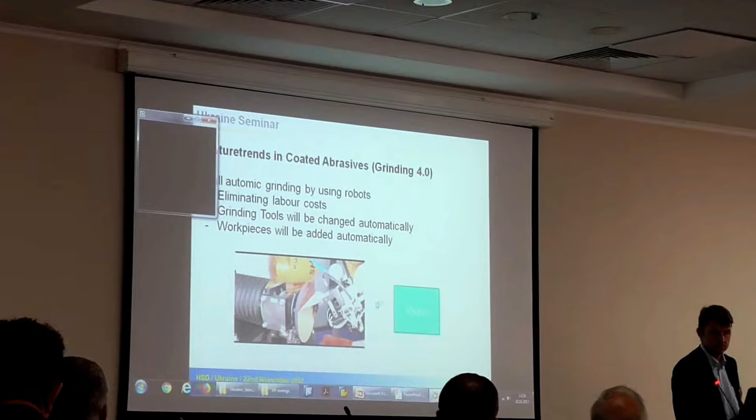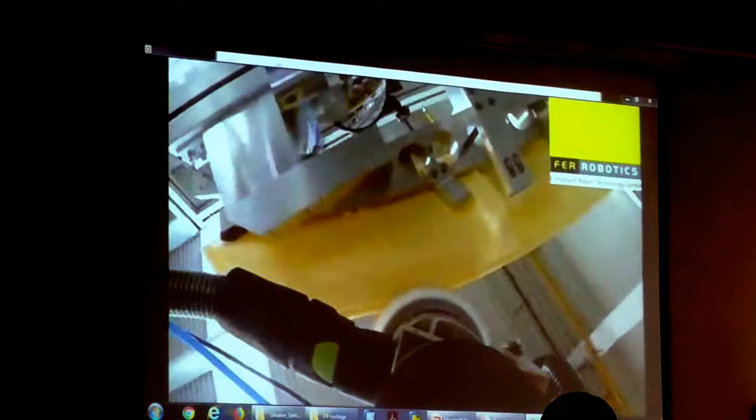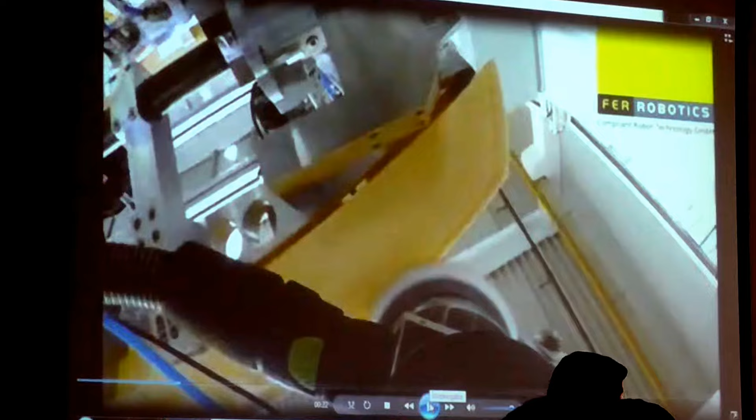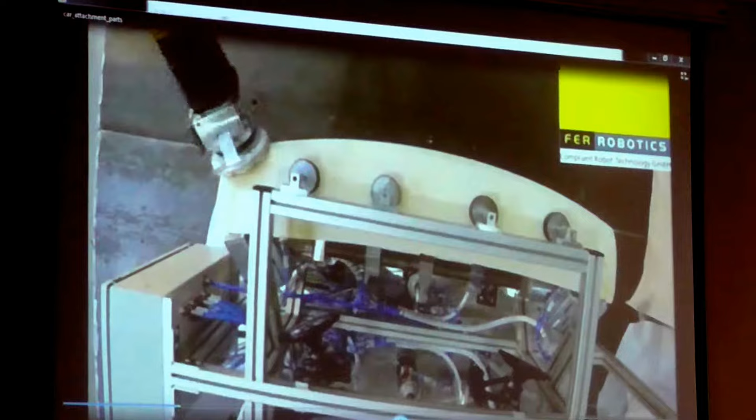So this is an assembly part for an automotive bonnet, like something like a spoiler, made from glass fiber. This is an assembly line of automotive production, a part made from fiberglass. And the robot is doing everything by himself, producing all the processes independently.

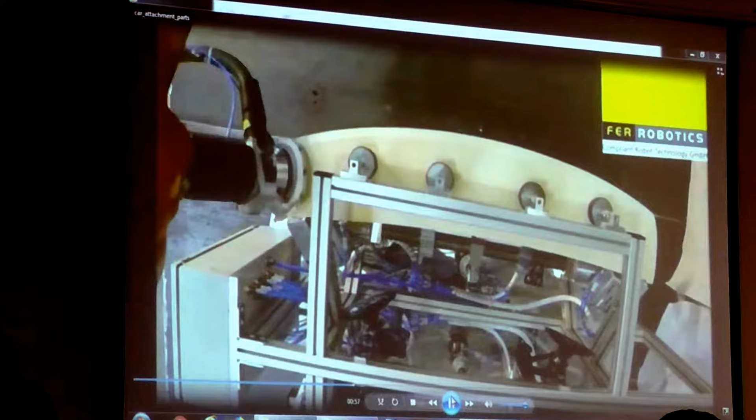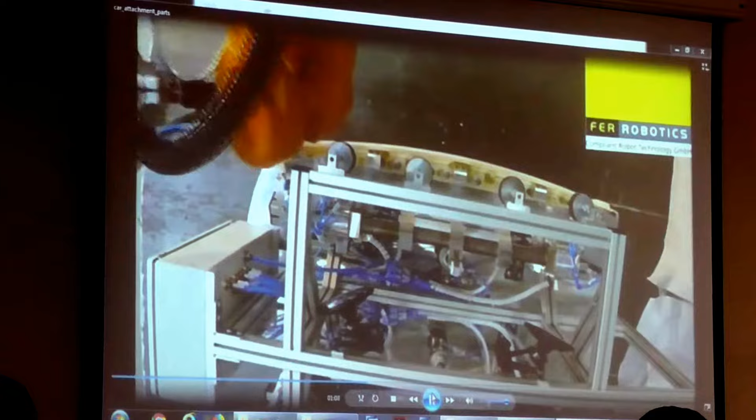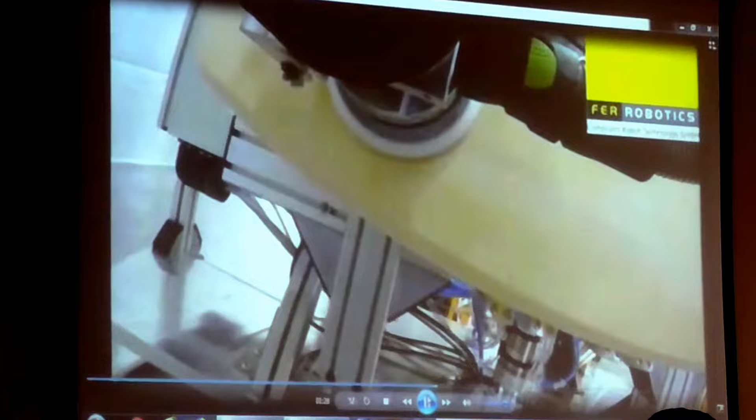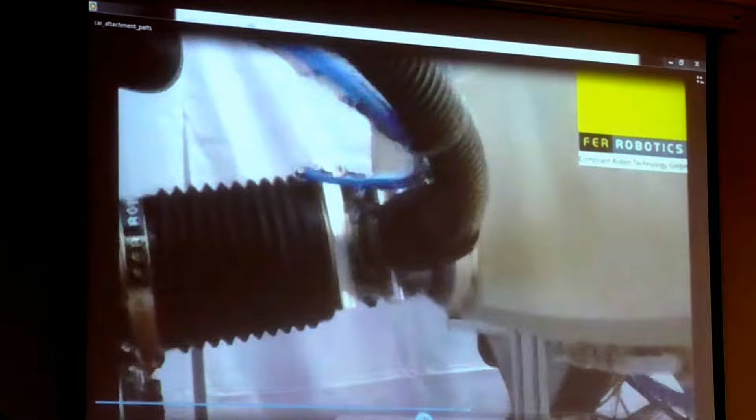Now he goes to the top side. So now the job is more or less done.

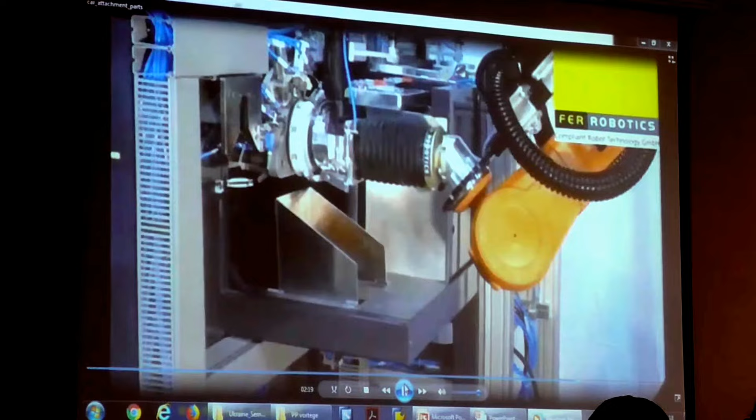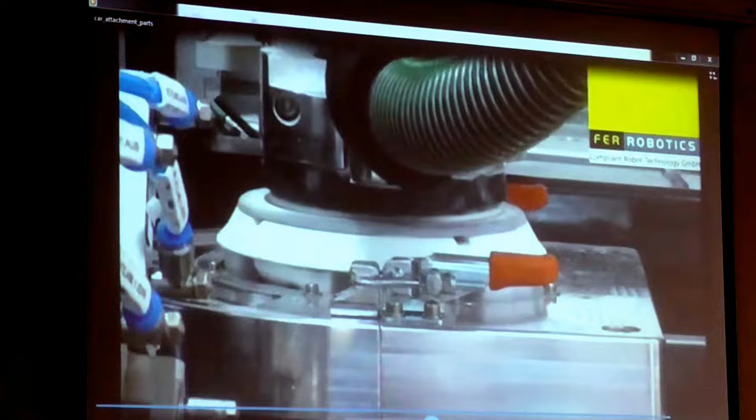Now the tool needs to be changed because the build of the disc is worn out. The old disc is removed, and the robot is picking a new disc.

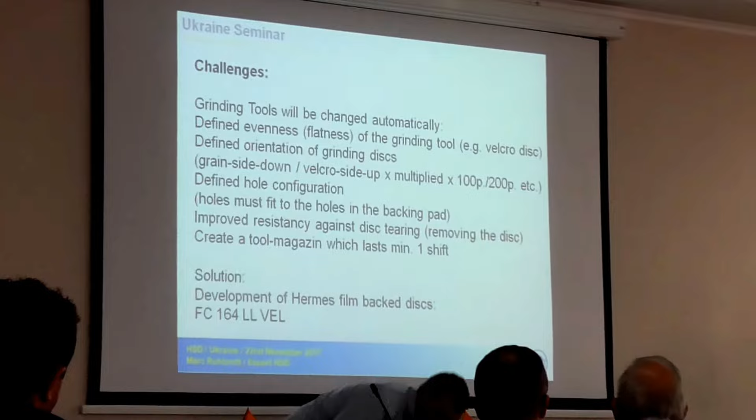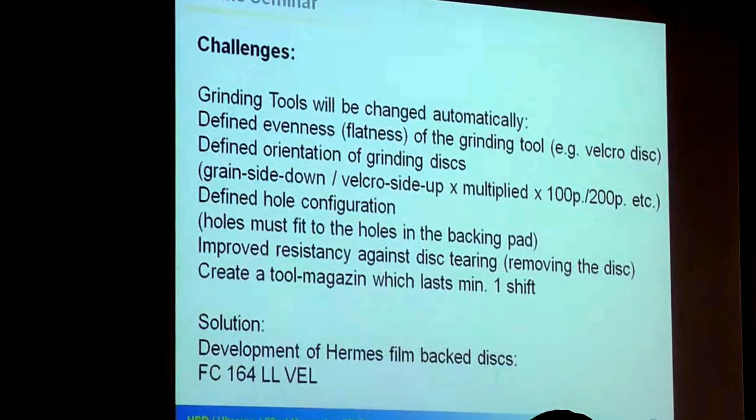This brings new challenges to the abrasive producers. We face new complications as abrasive manufacturers, since the tool needs to be changed automatically.

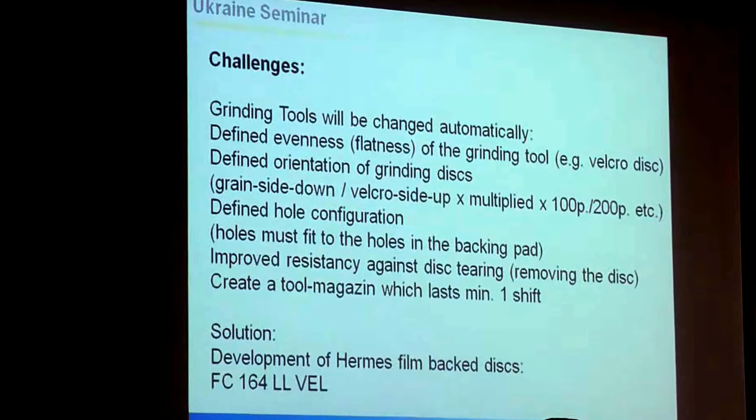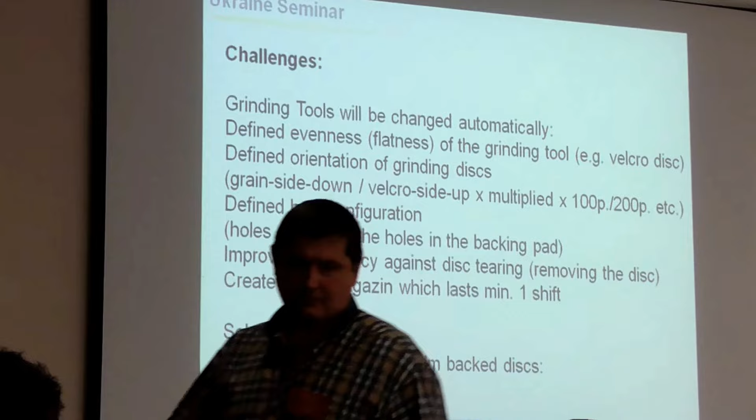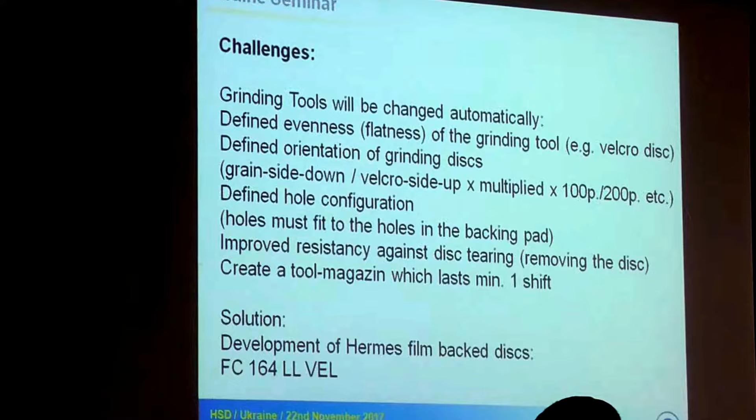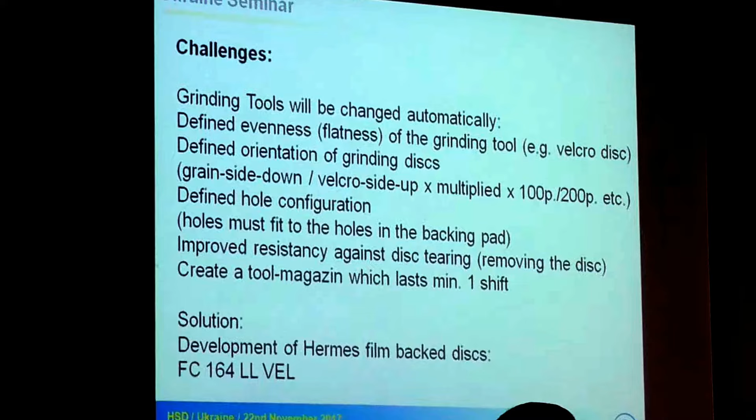The Velcro disc in this case needs to have a very, very good flatness. The robot cannot distinguish whether the grain side is up or the Velcro side is down, so he needs to have a certain kind of orientation. Every disc needs to have the same orientation, since the robot itself cannot determine which side the disc lies on.

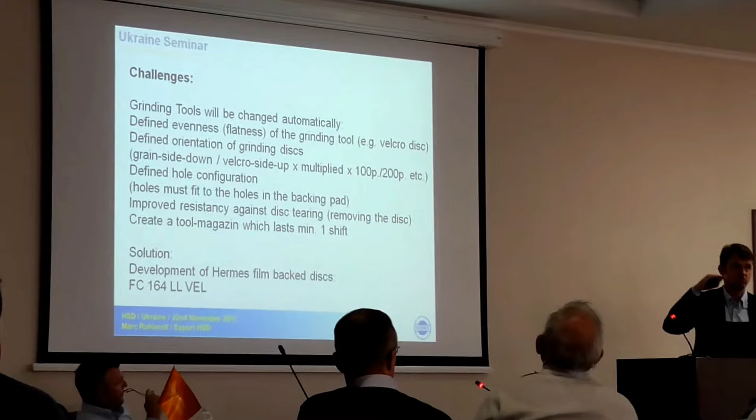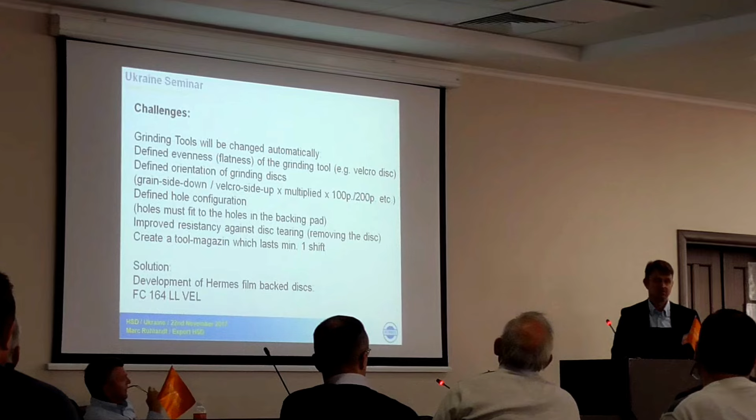The robot requires per shift 100 or 200 discs, so we need to have 200 discs in one rack, pre-prepared with the same orientation.

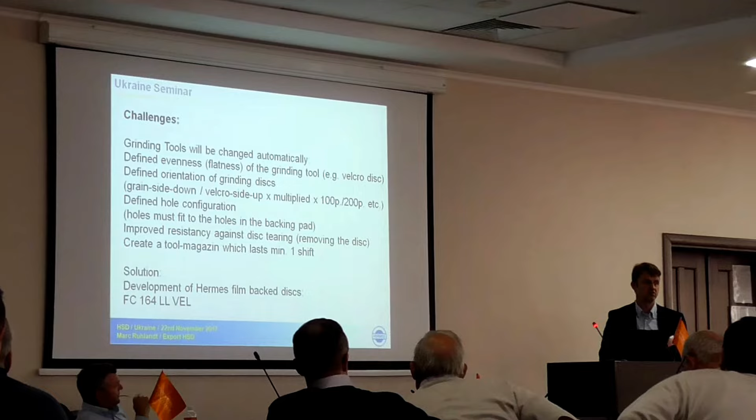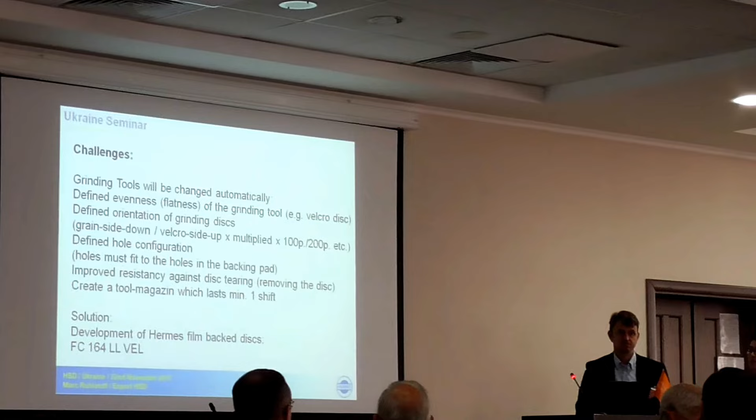Then we saw some discs with hole configuration for dust extraction. Every hole needs to fit the backing pad. These holes are there for removing dust, and each must be precisely fitted to the backing pad.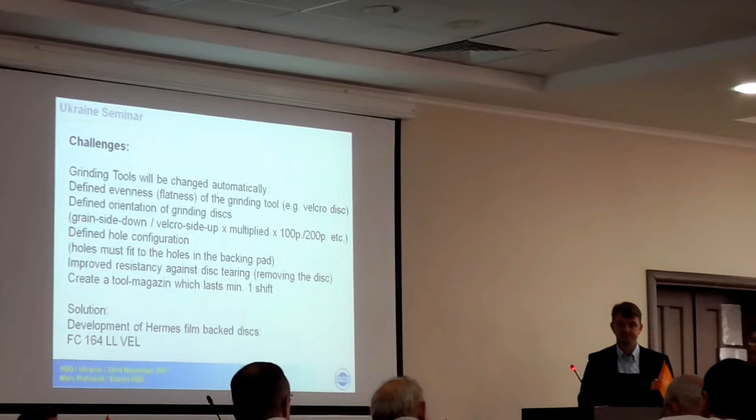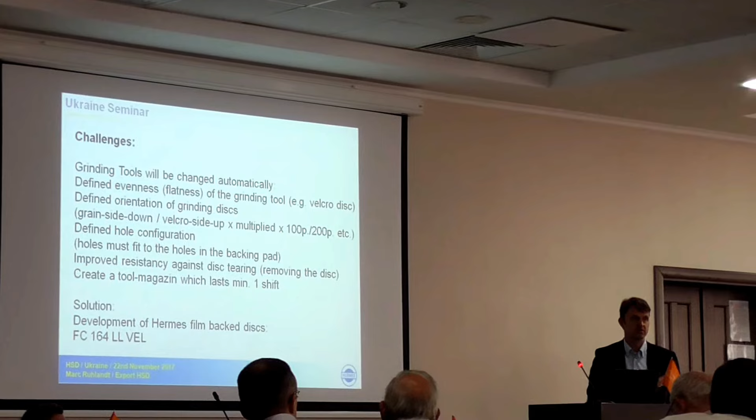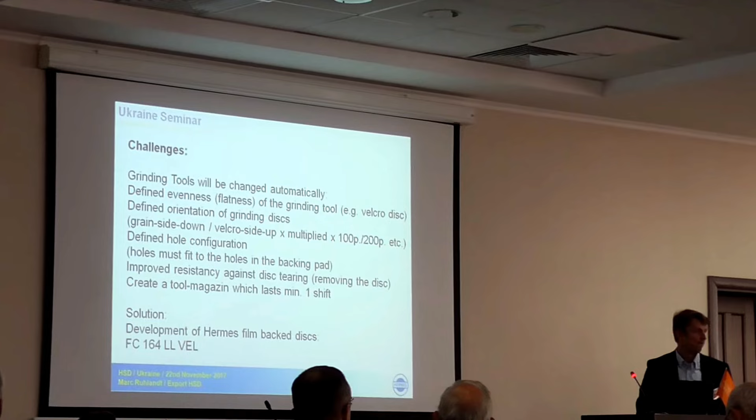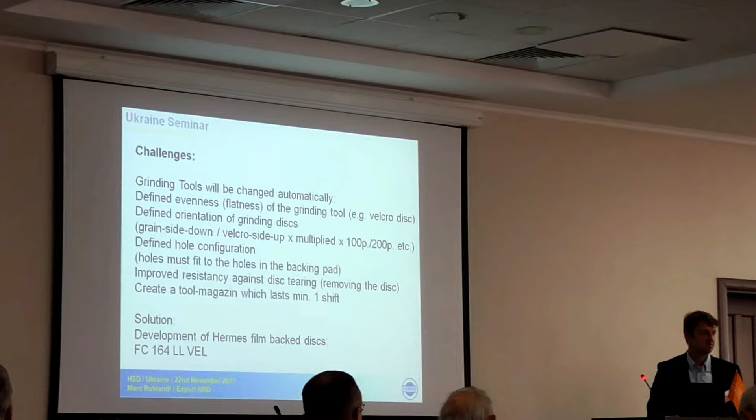Last but not least, the robot is not as careful as a worker, so when he removes the disk automatically, perhaps a paper disk will tear. The robot doesn't have the same flexibility as a worker, some discs may tear, so the robot must be able to remove the torn disc automatically.

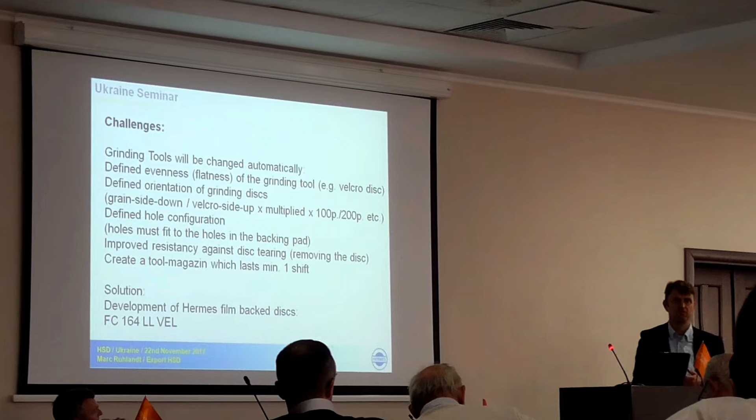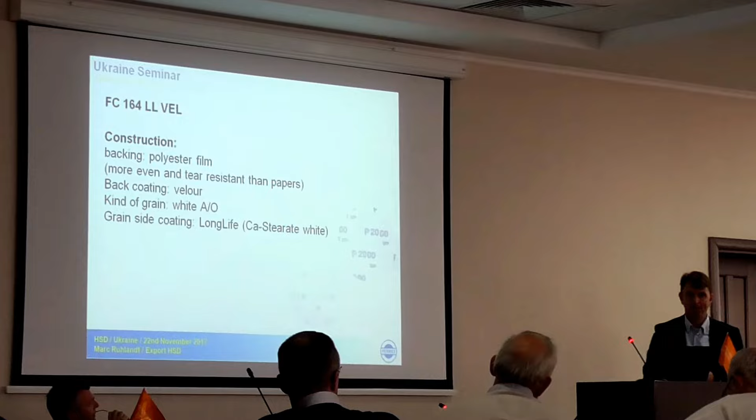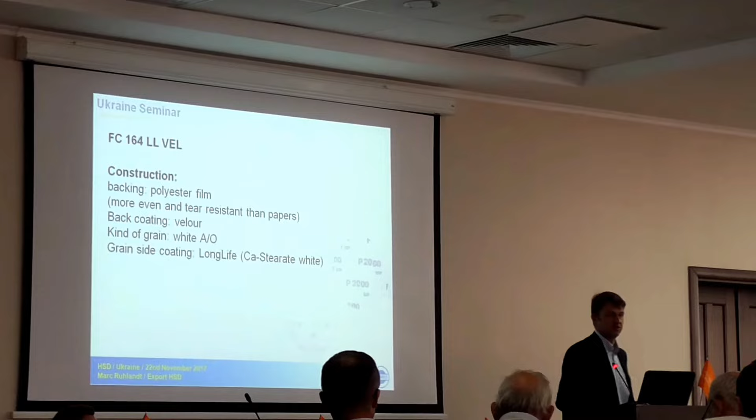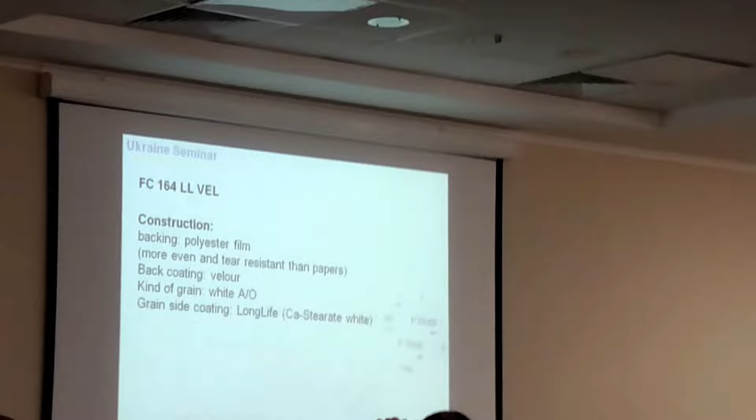Therefore we are forced to develop something new, and we developed a new film type called FC164 LL Velcro. This pushes us toward new developments, so we created a special type, FC164 LL Velcro, combining all the benefits described into one product.

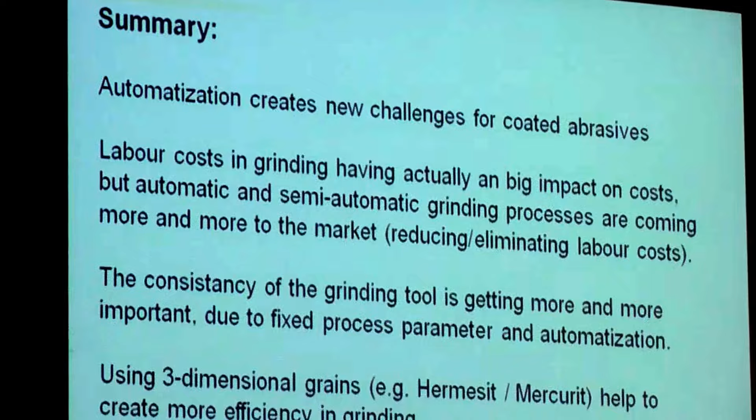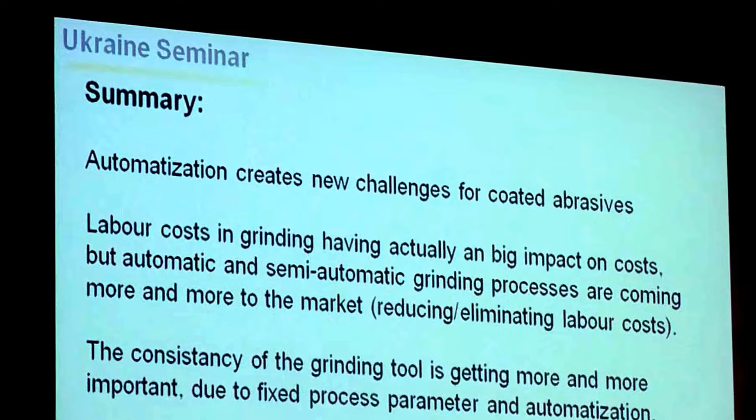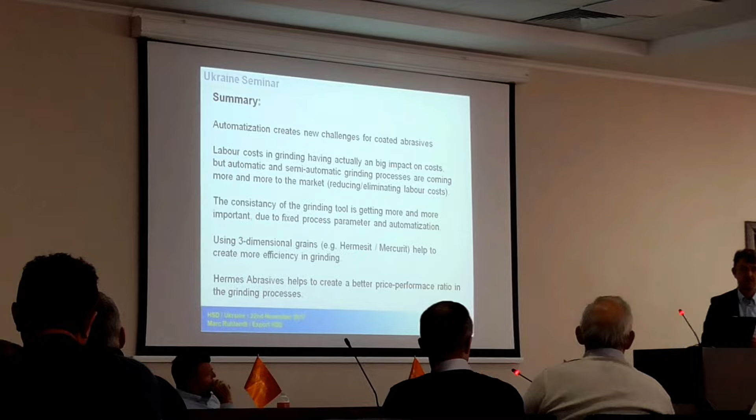So what is the summary, the last but not least from this session from all of us? Let's sum up what is most important here. The automatization, which is coming more and more, will bring new challenges for the abrasives industry that we face day by day.

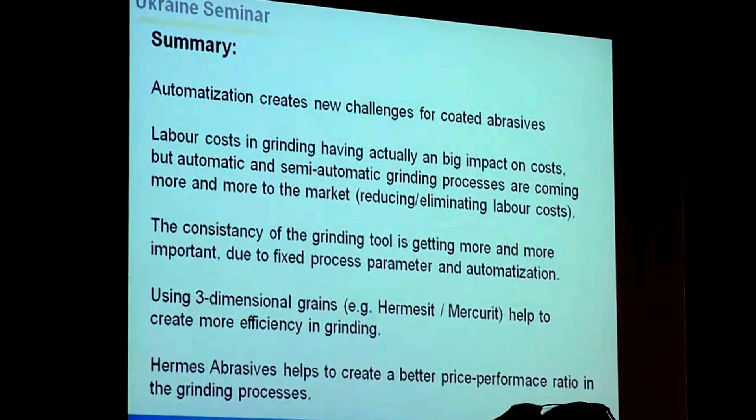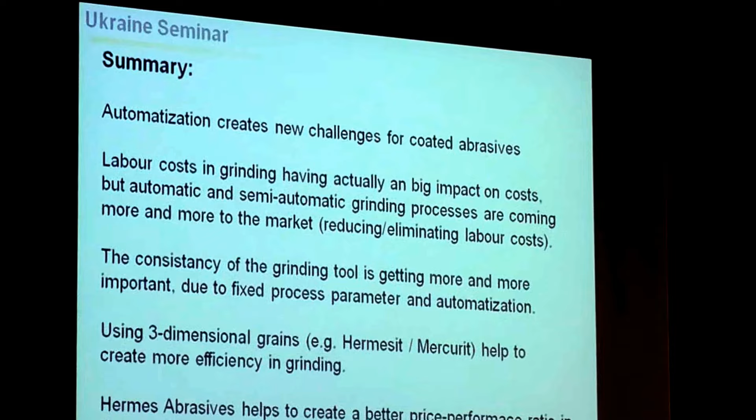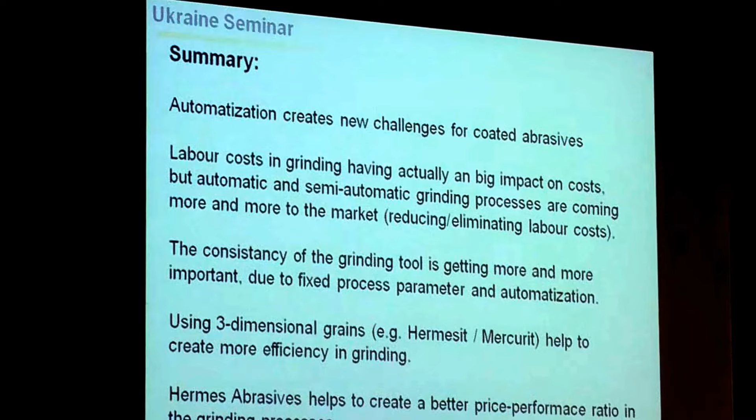The workers' costs, the labor costs, actually have a big impact on grinding, since labor cost is a large part of grinding expenses. But the semi-automatic and automatic grinding processes will help us eliminate the labor cost effects in the process.

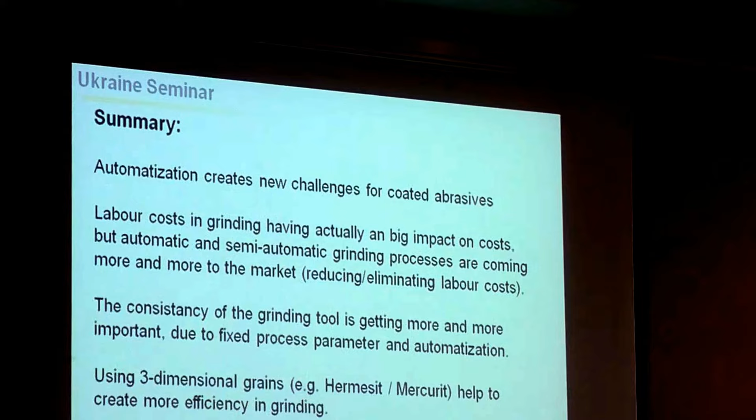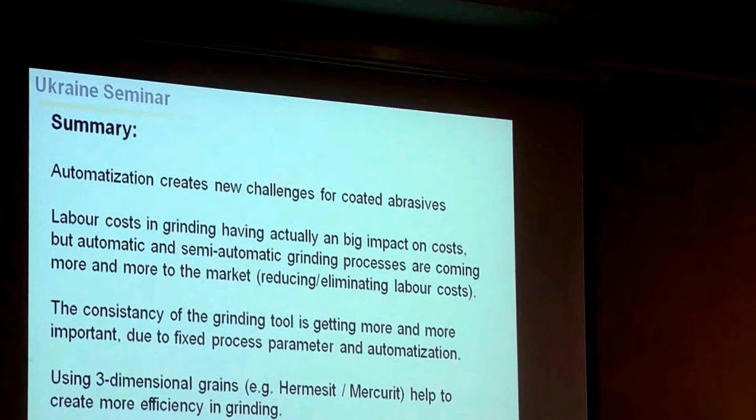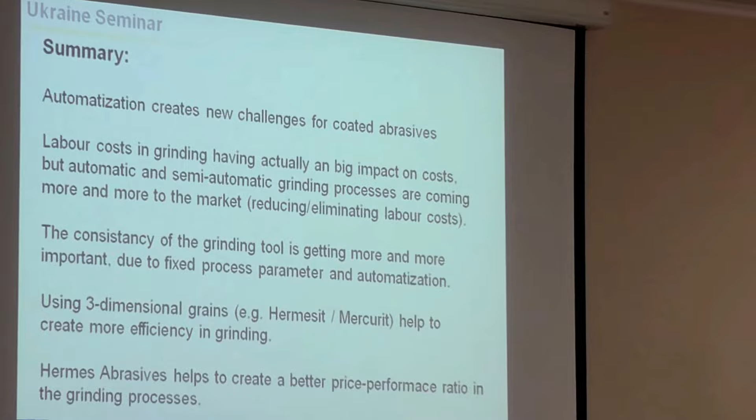So for this kind of machines, you need a reliable partner for abrasives, a partner who brings a high consistency in his products, meeting all the necessary specifications very precisely.

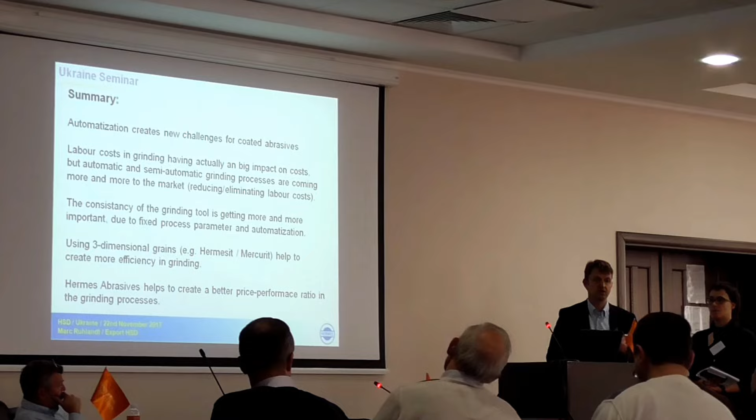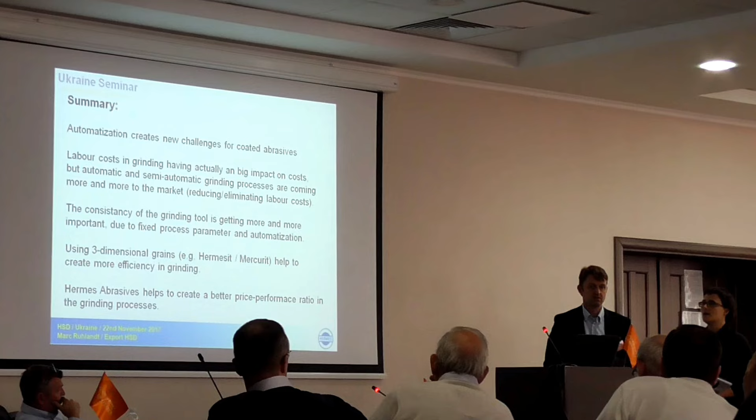The three-dimensional grains, as mentioned, the Hermesit or the Mercurit, will bring good benefits to the processes, introducing the necessary parameters into the process.

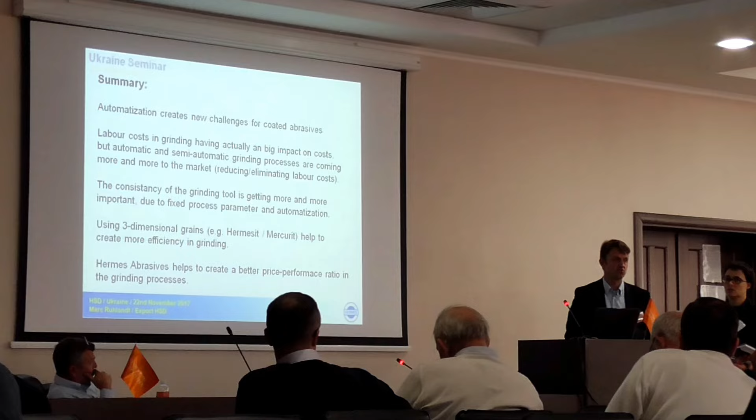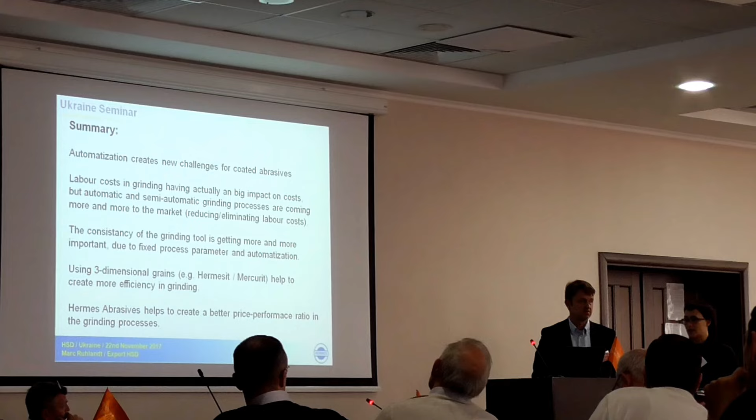We are here to discuss with you, and we are open to discuss new solutions in order to bring a better price-performance ratio to your processes.